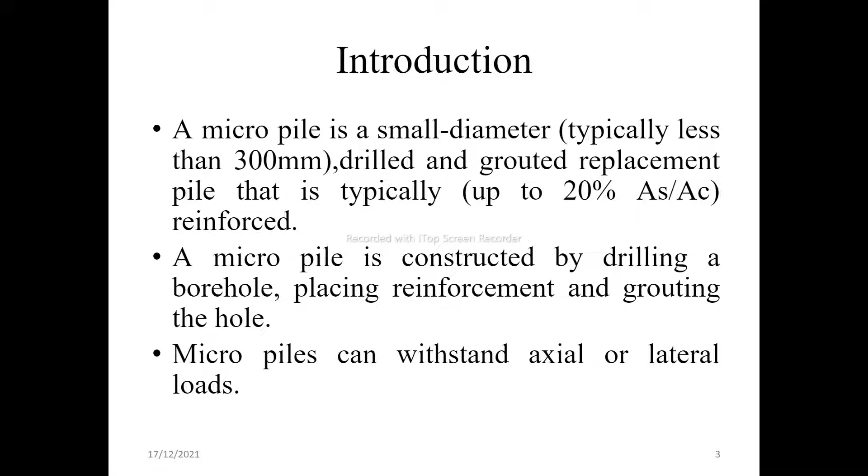The use of micropiles has grown significantly since their conception in the 1950s. In 1952, they were first introduced in Italy for foundation restoration of World War II damaged buildings. In the 1960s, they were widely used in Europe for underpinning old sensitive structures. In the mid-70s, they were first introduced in the USA, and in the 1980s, they were introduced in East Asia.

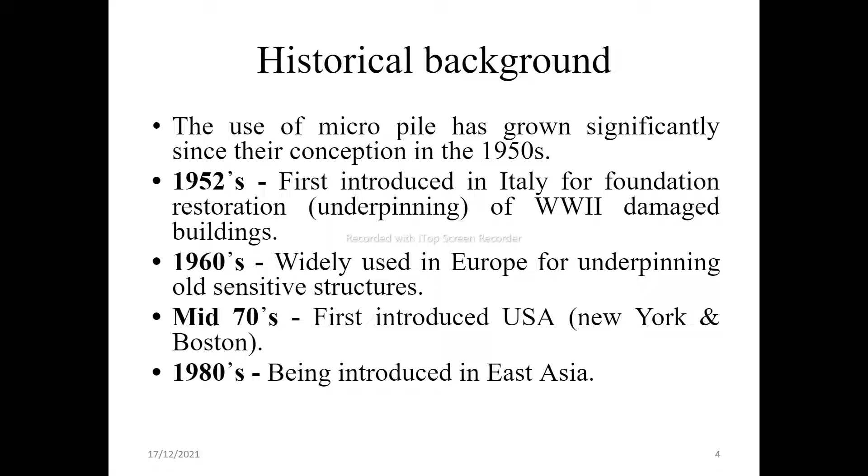Classifications are based on design application and based on grouting method. Based on design application, Case 1: micropile elements which are loaded directly, where the pile reinforcement resists the majority of the applied load.

Case 2: micropile elements circumscribe and internally reinforce the soil to make a reinforced soil composite that resists the applied load.

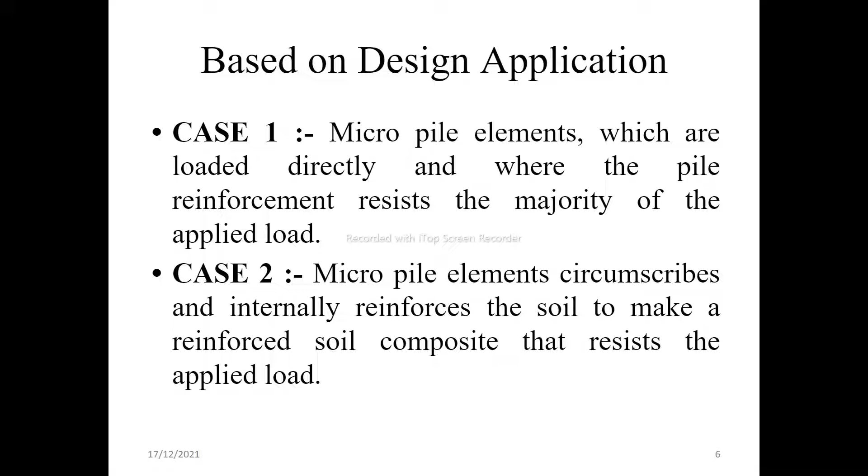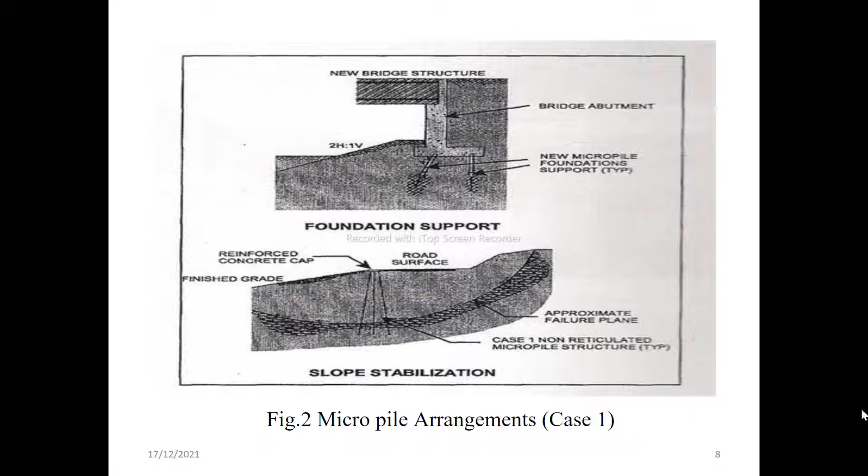Now, based on grouting method. The method of grouting is generally the most sensitive construction control over grout-to-ground bond capacity. Grout to ground capacity varies with the grouting method.

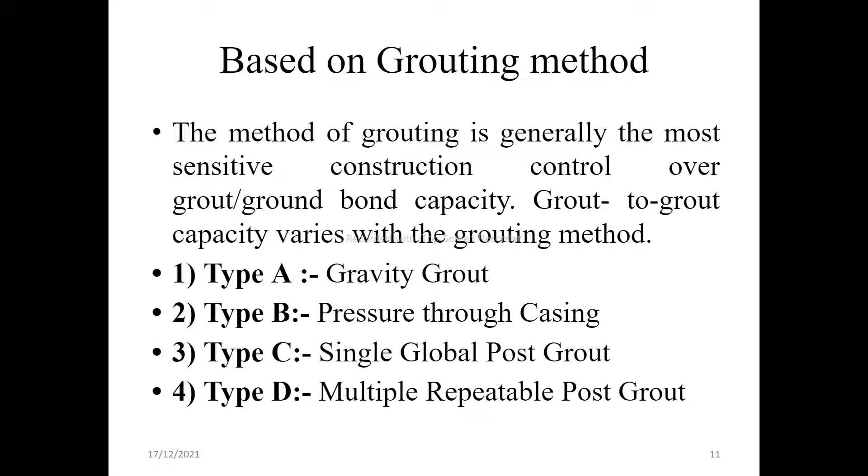Type A: gravity grout. Type B: pressure through casing. Type C: single global post grout. Type D: multiple repeatable post grout.

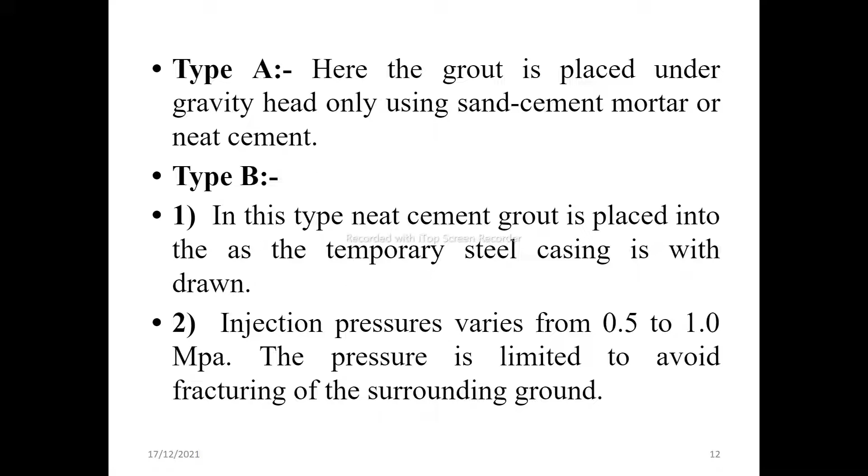Type A: here the grout is placed under gravity head only, using sand cement mortar or neat cement. Type B: first, neat cement grout is placed as the temporary steel casing is withdrawn. Second, injection pressures vary from 0.5 to 1.0 MPa. The pressure is limited to avoid fracturing of the surrounding ground.

Type C: this is done in a two-step process. As in Type A, prior to hardening of the primary grout, similar grout is injected one time via a sleeve grout pipe at a pressure of at least 1.0 MPa.

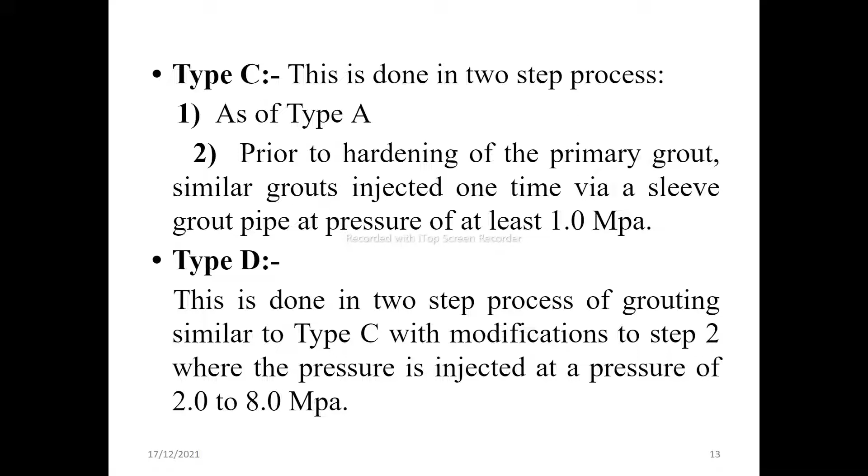Type D: this is done with a two-step process of grouting similar to Type C, with modifications to step 2, where the pressure is injected at 2.0 to 8.0 MPa. These are the different methods of grouting.

Construction sequences. The installation process is in accordance with the requirements of NBN EN 1536, 1999. First, positioning and drilling of the first section of the drill casing. While drilling, the drill casing, equipped with a drilling head fixed on a rod, is inserted into the soil.

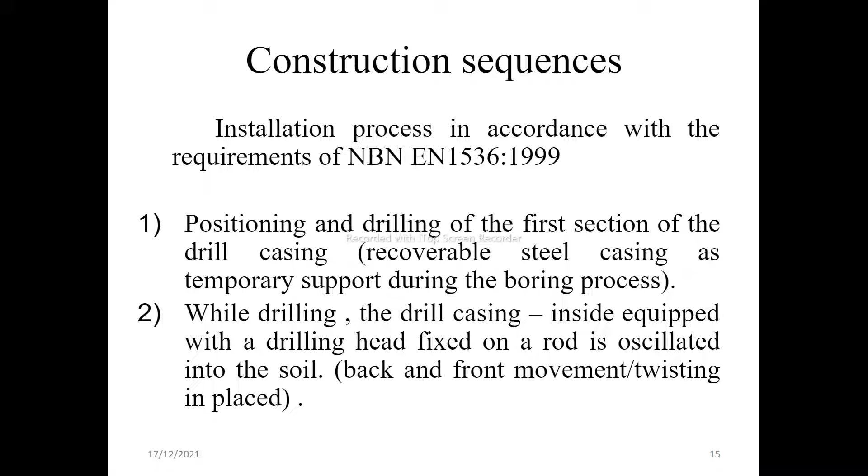As the drilling process progresses, soil is removed from the borehole by excavation, and additional sections of casing are joined to protect against soil collapsing into the borehole during drilling.

After reaching the design depth: cleanup of the borehole, removing the drilling tool, drilling fluid pumped out of the bore, and formation of the pile - that is, insertion and lowering of the reinforcement cage, and pouring of the concrete. During the continuous concreting process, the temporary casing elements are progressively withdrawn, whereby the concrete forms the pile shaft.

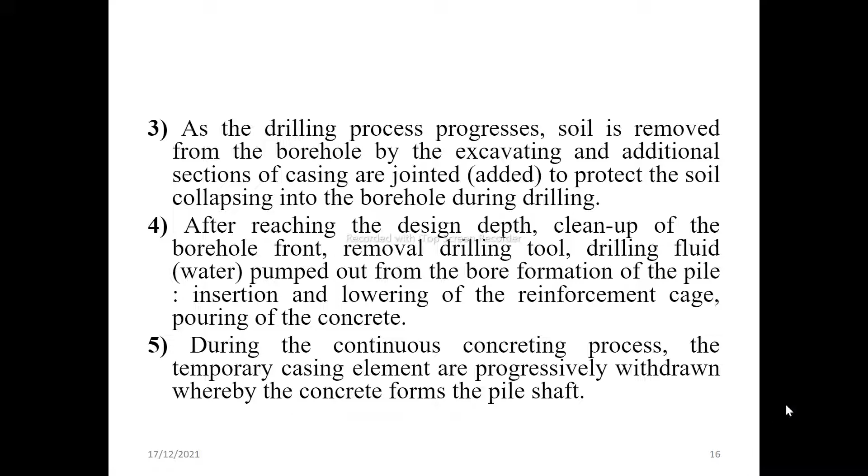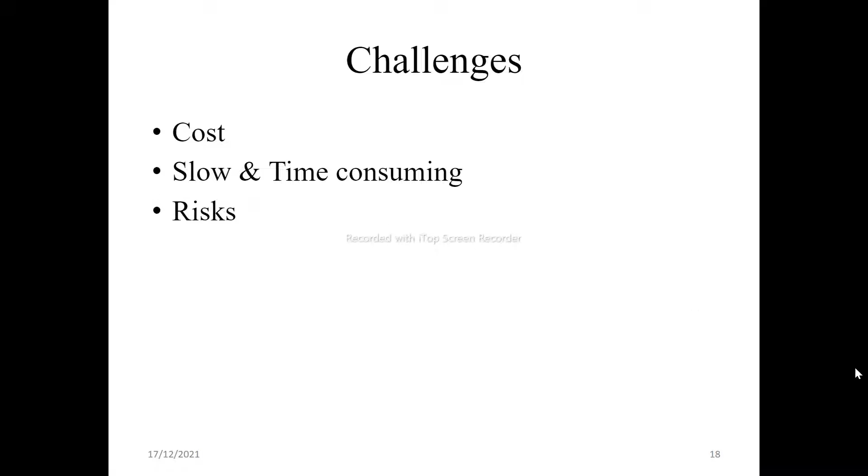Challenges: cost, slow and time consuming. Risk of cost - price depends on reinforcement type, volume of the hole, grouting method, location due to accessibility, length or quantity of piles, high steel cost, and high labor cost.

Grout and fabricated cage in-site, compared to mass production of precast RC piles. Specialist technology is expensive, with few players in the market.

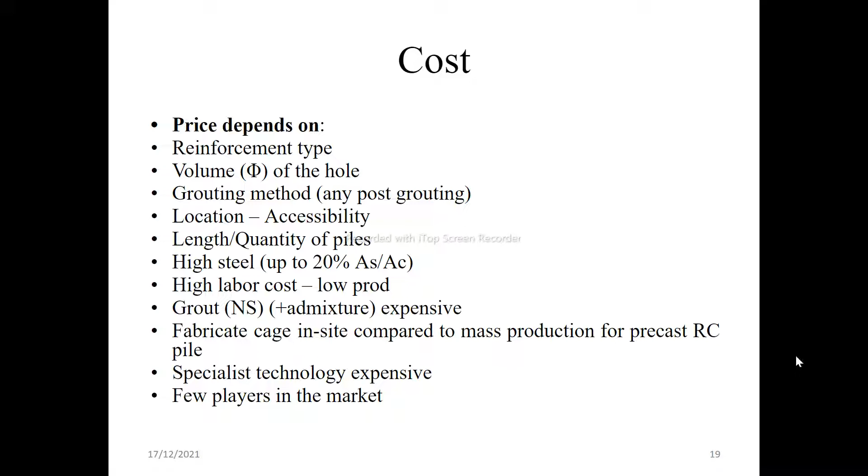Slow and time consuming because of the following factors: although drilling rate alone is high, adding or dismantling of rods manually, installation/extraction of casing is time consuming, manual fabrication of cage on site, fixing of couplers and spacers, welding takes time, manual mixing of cement grout, high rig breakdown mostly hydraulic, and estimation of soil or selection of drill bit makes drilling difficult and slow.

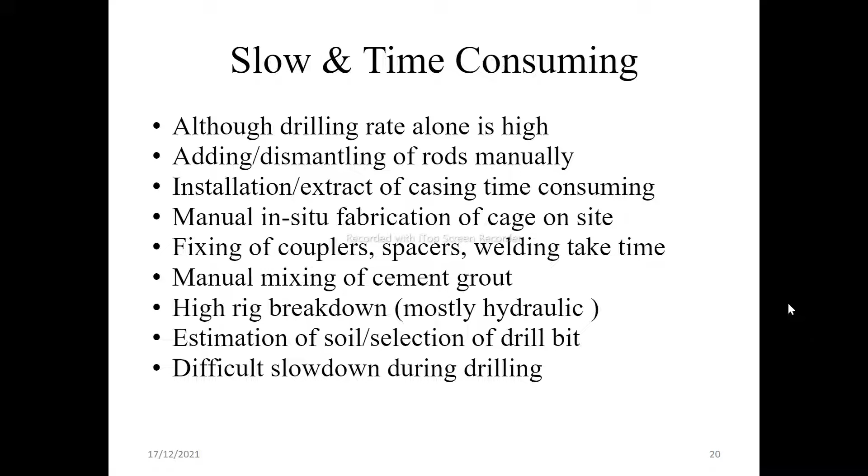Applications: first, supporting new loads in congested areas, seismic retrofit, arresting structural settlement, resisting uplift and dynamic loads, underpinning, and excavation support in confined areas.

Underpinning, excavation support in confined areas.

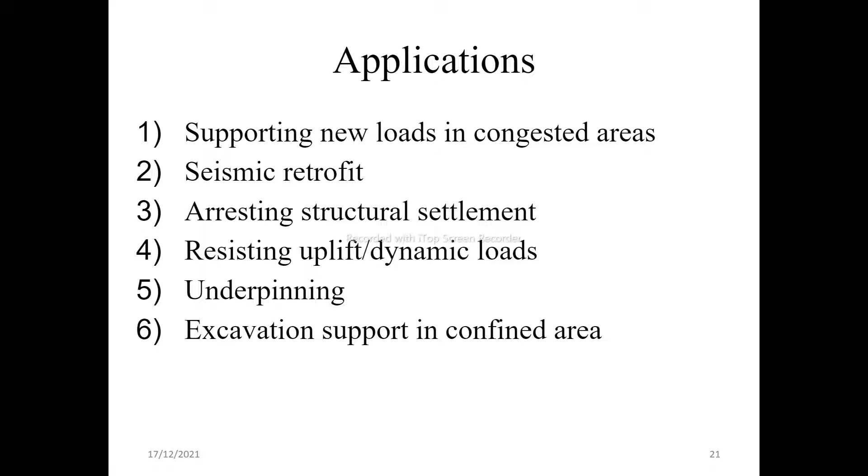Case study of micropiles in Canada: a 7 kilometer long, 4-lane highway, 104 West, river bridge, 141 meters, two twin spans in Antigonish, Nova Scotia, Canada, supported on 152 micropiles - 4 at abutments and 2 at central piers - characterized by varying thickness of overburden with cobbles and boulders, soft mudstone, and bedrock.

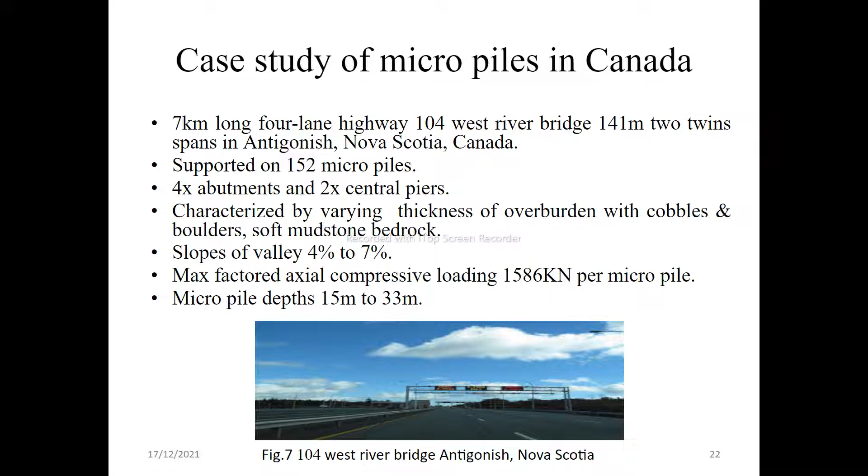Slopes of the valley range from 4% to 7%, with maximum factored axial compressive loading of 1586 kilonewtons per micropile. Micropile depth ranges from 15 meters to 33 meters.

Case study of micropiles in India: the Border Roads Organisation (BRO) used this technology for the first time in India to build an all-weather road to Daulat Beg Oldi, a forward post along the India-China border in Ladakh, at an altitude of 16,696 feet from mean sea level.

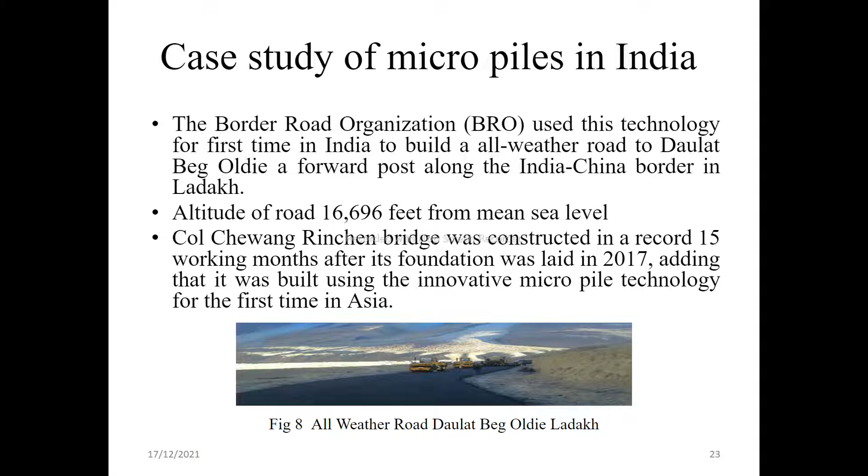The Col Chewang Rinchen Bridge was constructed in a record 15 working months after its foundation was laid in 2017, built using the innovative micropile technology for the first time in Asia.

Advantages: micropiles are often used to underpin existing structures where minimum vibration or noise is of prime importance. Micropiles can be easily installed where low headroom is constrained.

Micropiles can be easily installed at any angle below the horizontal, using the same equipment used for ground anchors and grouting projects. They do not require large access roads for drilling platforms.

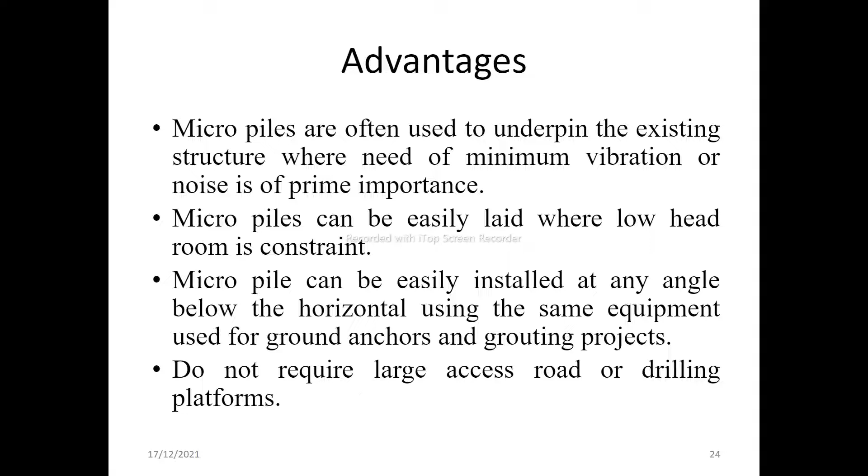Conclusion: the use of micropiles is a versatile ground improvement technique and has been used very effectively in many stability problems. The API pile system provides good compression performance in terms of lateral stability and vertical movements.

Tension piles can be economically reinforced by a bar system. Micropiles can be a costly option to support lateral load and bending moment.